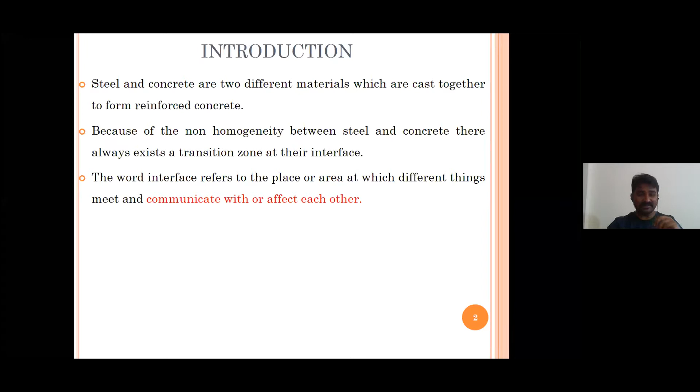So what is steel concrete interface? Let me begin with introduction. Steel and concrete are two different materials which are cast or fused together to form reinforced concrete. As the word interface refers to a place or area at which different things meet and communicate with each other, I'm more focused on this part, where they affect each other. See here, this is a cut sample.

This I took a core of a steel part and I just try to cut. So as you see, this is the steel part and this is the concrete part. Through our normal eyes, if you see the interface, it looks absolutely fine. There are no pores, nothing. So few cracks are there. Those cracks are due to cutting malfunctions.

So if I observe a particular section in scanning electron microscope, how do I see it? You see actually this way. This is the steel bar, and this is a scanning electron microscope image of secondary electrons. There are two modes: one is secondary electron mode, and another one is backscattered electron mode. This particular image is of secondary electron mode. So this is my steel bar, this is my concrete, and in between that there is a porous region. We are terming that as the porous zone between steel and concrete. As you can see, this is a porous zone between steel and concrete. And why this happens actually?

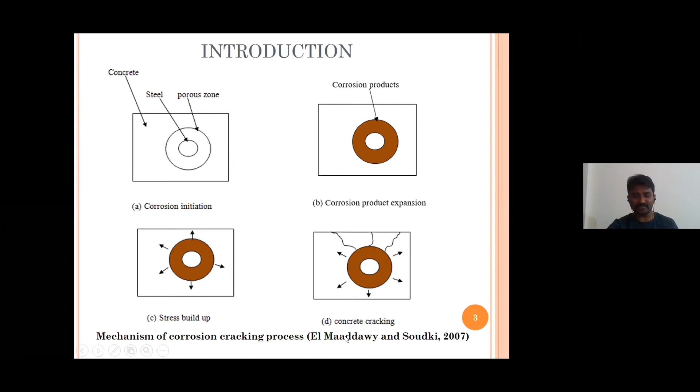So let me move on with the service life prediction. The basic focus of our study was to define service life in a perfect manner, and I'll be discussing the two-stage model and the three-stage model.

Way back in the 1980s, Tuutti proposed a service life prediction model which is a two-stage model. The first stage is the initiation period. He believed that once corrosion is initiated, soon after that the propagation starts.

There can be n number of reasons why corrosion initiates. Once corrosion is initiated, it takes a certain amount of time to get to the crack stage. At that point, the functional service life ends.

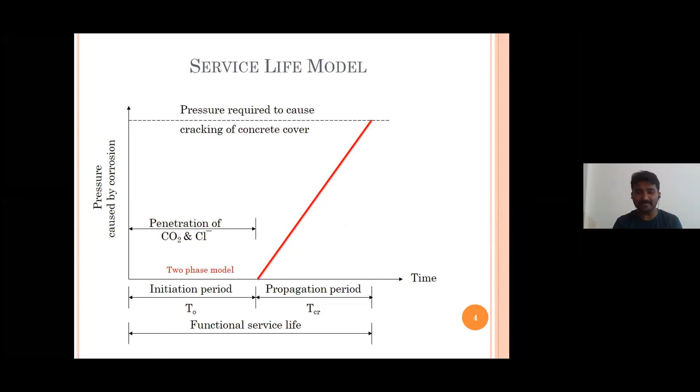After that, Liu and Weyers came up with the three-stage model. In this three-phase model, they considered the effect of porous zone thickness. They believed there is something happening at the steel-concrete interface that needed to be identified, and they found out that there is a porous zone thickness. Until that porous zone thickness is completely filled, there will not be any expansive pressure applied on the concrete pad. Because of that, they termed it free expansion or expansion time.

So this is the initiation period. After that there is the free expansion stage, and after that it is the stress build-up stage. So Liu and Weyers divided, or refined, the two-stage model into a three-phase model. They incorporated porous zone thickness into their model.

When people started assuming or predicting the service life using this model, the predicted service life came very close to the actual service life of the structure. So here we find the importance of porous zone thickness. However, in predicting the service life of a structure, people started assuming the porous zone thickness.

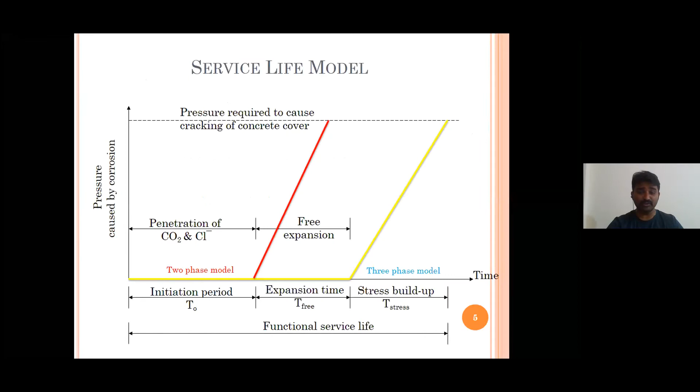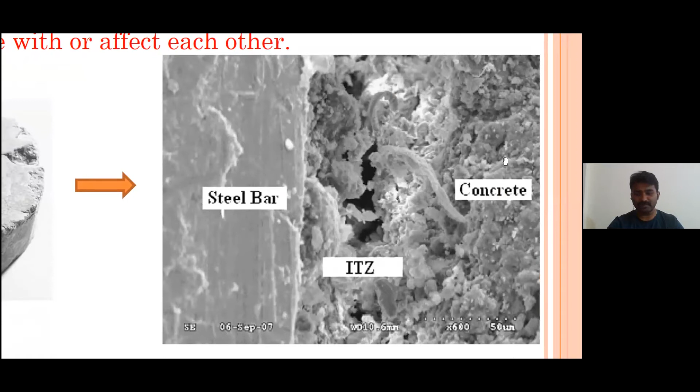For example, if you see this distance, I can show you in zoomed mode. See here, this is 600x, and these dots, as you can see, this is a 50 micrometer distance. As you can see, this much distance is nearly around 50 micrometers. Until this 50 micrometers is completely filled up, there will not be any expansive pressure on the concrete. So people started assuming the porous zone thickness.

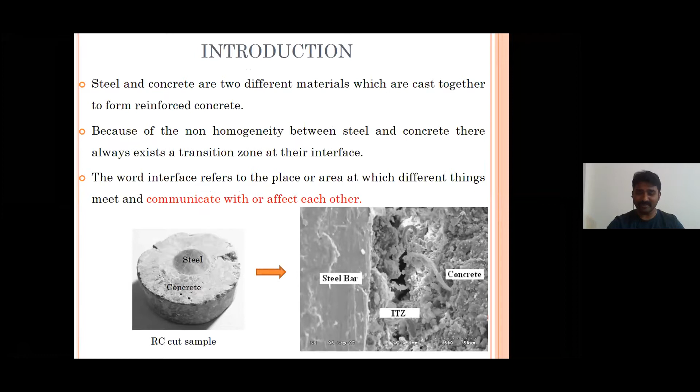Liu and Weyers in the 1990s predicted that there is a porous zone thickness, but without any experimentation or experimental validation, they started assuming this porous zone thickness. What happens then? Once they start assuming the porous zone thickness, even a slight variation in that assumed value leads to huge variation in the predicted service life of structures.

As you can see, Maaddawy and Soudki in 2007 proposed that the service life should be determined using this equation. As you can see, this is TCR, the total propagation period. They divided the propagation period by considering this delta naught, that is the porous zone thickness at the steel-concrete interface.

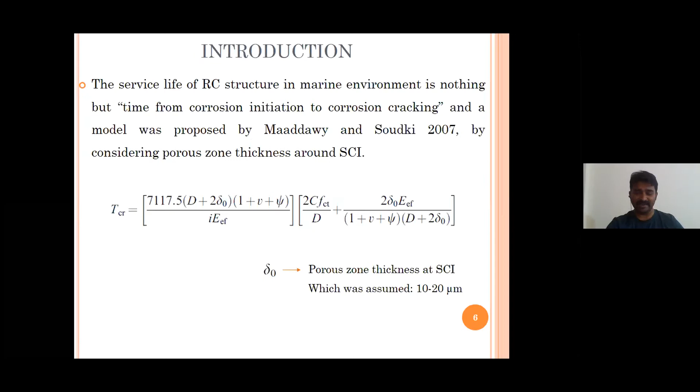However, in this case also, they assumed the porous zone thickness as 10 to 20 micrometers without any experimental validation or verification. In this present study, what we have done is experimentally try to find out that porous zone thickness.

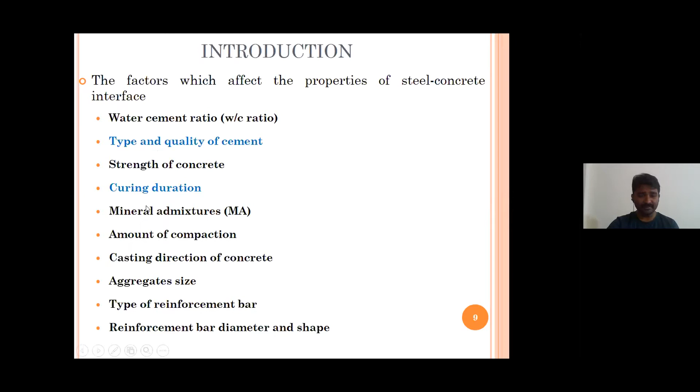While making the literature survey, we understood that there are very few papers particularly focusing on steel concrete interface. I'm happy to inform you that from India, me and my guide, Dr. Vibhuti Bhushan Das from NIT Surathkal, were the first people to contribute to the steel concrete interface research from India. If you see the Scopus website from India, there are only 3 papers, and all 3 papers are ours. So only a few papers are available regarding this. This is a thrust area right now. If anybody is interested, please continue your research on this part. A lot of things need to be done yet on understanding the steel concrete interface properties.

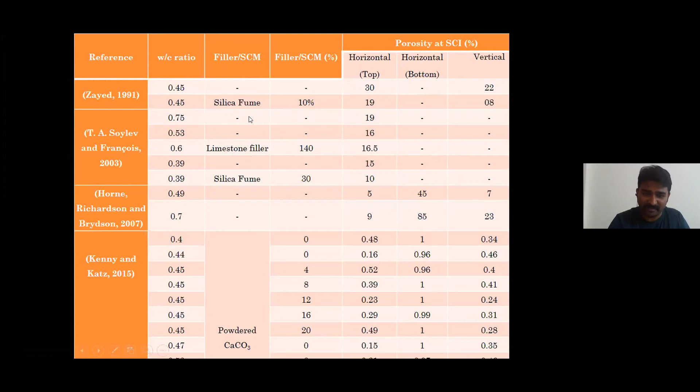So these are references, Zayed and others, looking at water cement ratio, filler, and what is the porous zone thickness. These are some of the literature data. Some people have used silica fume, studying what happens if silica fume is added. These are a few other studies in terms of micrometers and percentages.

To present that research in a condensed form, these are different researchers who have studied the effect of water cement ratio. Please remember, this is literature data that we have compiled, not data that I have done myself.

So what happens if water cement ratio increases, to the porous zone thickness at steel concrete interface? As you can see, all the lines are going up. As the water cement ratio increases, the porous zone thickness at steel concrete interface is increasing. As the water cement ratio increases from 0.4 to 0.5, the porous zone thickness increases up to 300 micrometers. Okay, so this is the literature data.

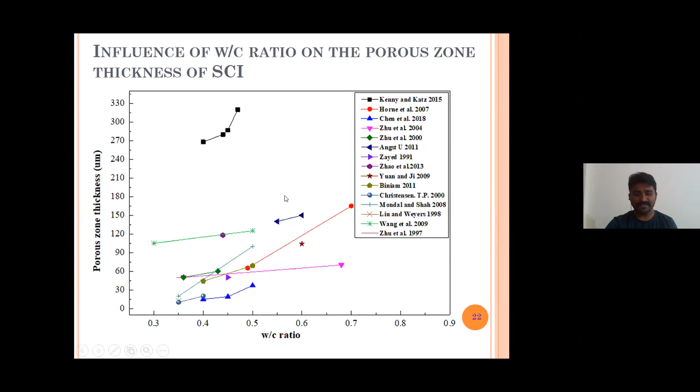In this present study, we tried to investigate the significance of different types of cements, for example OPC, PPC, and PSC. Nowadays people are shifting towards PPC and PSC, so we tried to understand the effect of OPC, PPC, and PSC on the engineering properties of steel concrete interface. We used characterization techniques: scanning electron microscope, energy dispersive X-ray spectroscopy, and nano indentation. Please understand, due to time constraints I am not discussing the nano indentation part, but we have done it to understand the engineering properties of steel concrete interface.

What do I mean by engineering properties? One is what is happening to porous zone thickness, what is the effect on the hydration products formed at the steel concrete interface, and what is the total influence on the bond strength. These three parameters I'm converging and terming as engineering properties. The second objective was to determine the effect of curing duration on compressive strength, ultimate bond strength, and microstructure properties of steel concrete interface produced with OPC, PPC, and PSC concrete. That was the focus of our study.

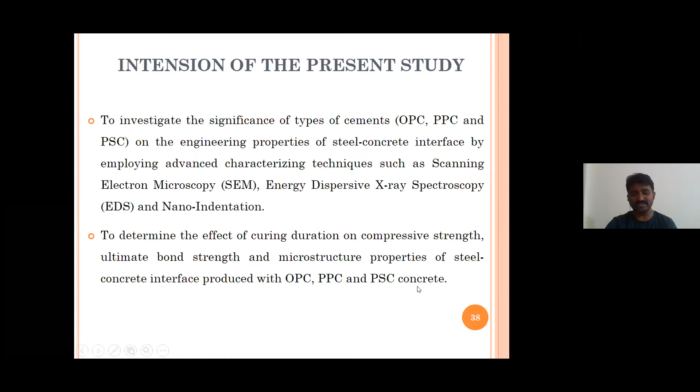So remember, folks, while doing the scanning electron microscope analysis, the sample preparation plays a very important role. My main focus was on sample preparation. I'll come to that sample preparation in a bit.

So this is the experimental methodology that we have adopted, physical and chemical properties of OPC, PPC, and PSC concretes. These are the chemical properties. Remember, OPC has highest specific gravity, PPC is slightly lesser than that, and PSC is very close to OPC concrete. Even if you see the fineness, OPC fineness is slightly lesser, PPC slightly higher, and PSC is the finest cement.

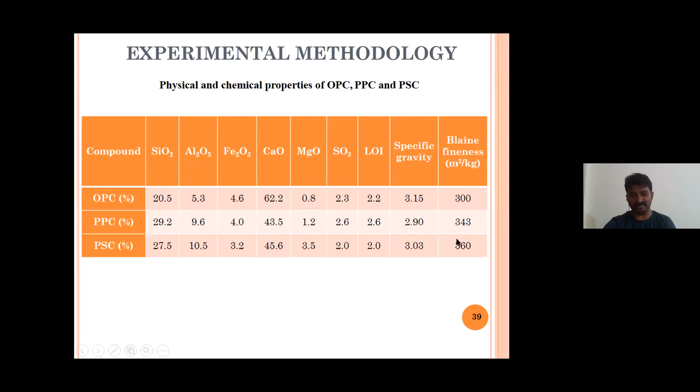So this is the gradation curve for OPC, PPC, PSC, fine aggregate, and coarse aggregates. This is coarse aggregate, fine aggregate, and OPC, PPC, PSC are almost similar, but there is a little bit of difference in the fineness.

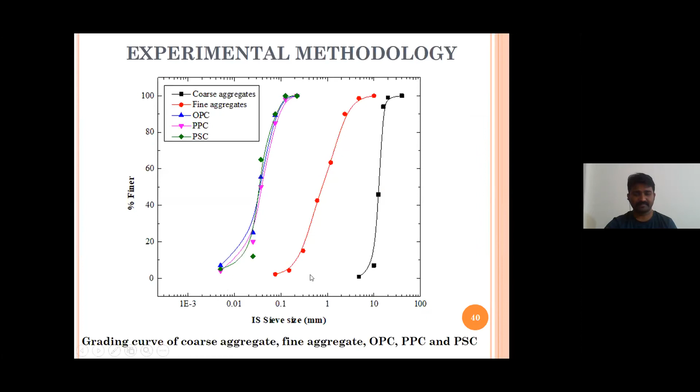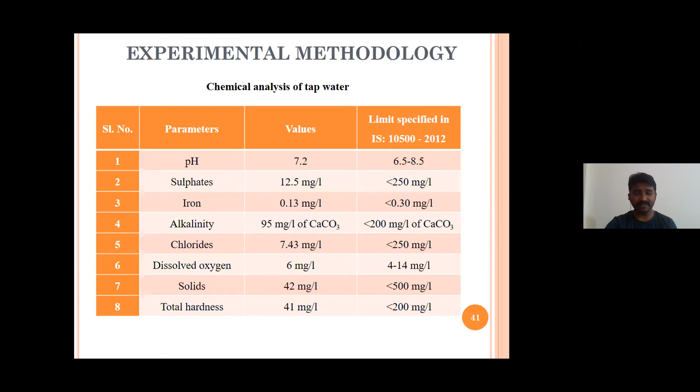So this is the chemical analysis of tap water. In one of the papers, reviewers have asked us, does the water properties affect the properties of steel concrete interface? The kind of water that we use for concreting, will that affect the properties of steel concrete interface? So for that reason, people have asked us to put this chemical analysis of water. So we have done the chemical analysis of tap water, which was available in our lab. So it satisfies, and we could classify this water as potable water.

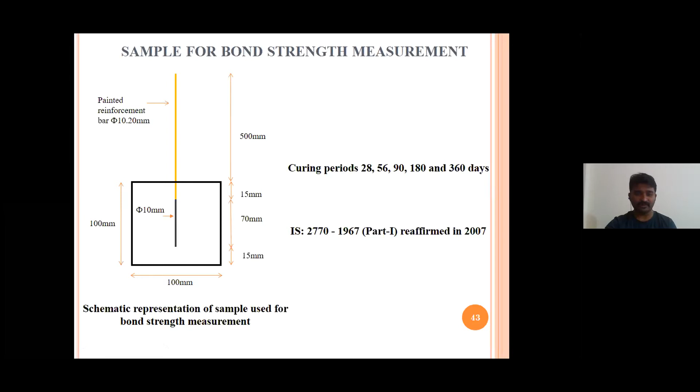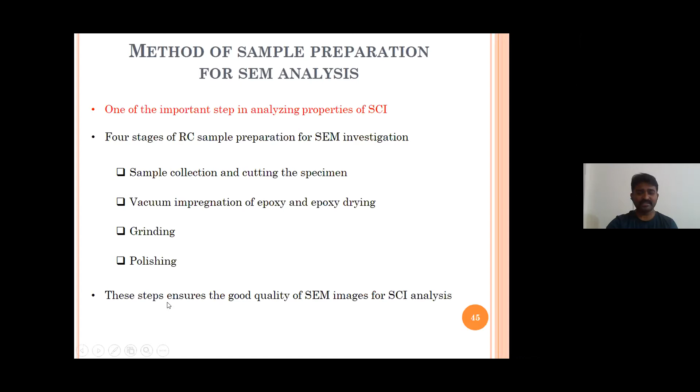As I mentioned before, sample preparation for SEM analysis is the prime important step to examine the engineering properties of steel concrete interface. This is one of the important parameters in analyzing the properties of steel concrete interface. Totally, we have divided the sample preparation into 4 stages. The first one is sample collection and cutting the specimen. Second one is vacuum impregnation and epoxy drying. Third one is grinding. Fourth one is polishing. These steps ensure a good quality of SEM images in the analysis.

So what do you mean by that? Remember, as I told you before, we had used RC sample of 10 centimeter. This is the C clamp which we have used to hold this cube in between, and this is the core cutter. And I tried to get the perfect steel concrete sample of this kind. See here, this is the steel and this is the concrete, and the diameter of bar that we have used was around 32 mm. The rod is of 10 mm and the total diameter of this is 32 mm.

Why have we restricted ourselves to 32 mm? Our SEM sample holder dimension was maximum it could occupy 35 mm. The diameter that you can imagine is like a carom coin. In the next slide, you'll come to see.

See, this is the way the samples look after cutting. This looks like a carom coin. The carom coin diameter is 32 mm total. In our case, the sample holder diameter of our SEM was 35 mm maximum, that's why we had to restrict our sample dimension to 32 mm.

So this is how the sample looks after taking the core. This is how the steel concrete portion looks like. After that, if you start cutting the concrete to observe the microstructure using high-speed or low-speed cutters, the concrete would thrash out, or chip out, in other words.

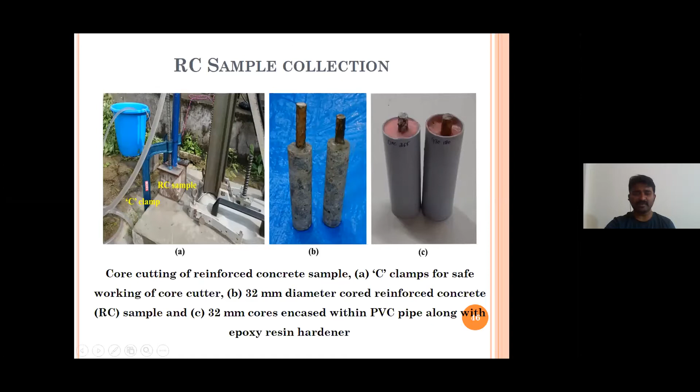As I'm cutting this sample, obviously there will be some amount of distortion, and because of that the porous zone thickness was increasing. To avoid that, we have used a slow speed precision diamond saw cutter. This is the precision diamond saw cutter supplied by Ducom.

See, this is the blade, and here we put our sample. To cut the sample in the high speed cutter, it hardly takes 8 to 10 seconds. But in the low speed precision diamond saw cutter, it takes around 4 to 5 hours to cut this cross section.

Okay, so once you cut, this is the way you see the samples after we cut. As you can see, this is the surface we are seeing, the cross section. This is the PVC pipe, and this pink color, as you are seeing, is the hardener, the rapid hardener, you could say. So this is another sample - likewise you see the steel concrete interface.

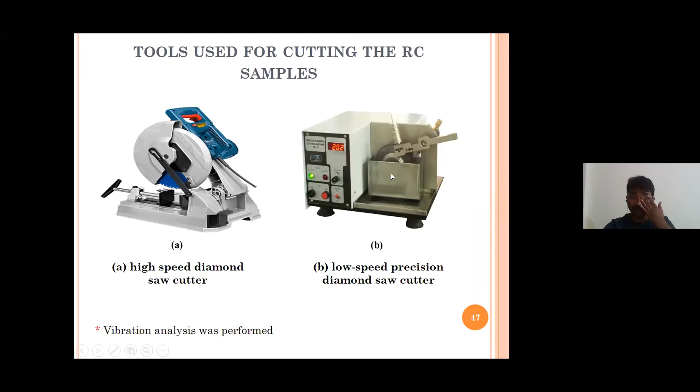Once you cut the sample, the next important part is what is the difference between cutting in a high speed diamond saw cutter and a low speed diamond saw cutter. That part we'll discuss in our coming slides. I'm just discussing here the sample preparation techniques before going for SEM analysis, so that we are discussing now.

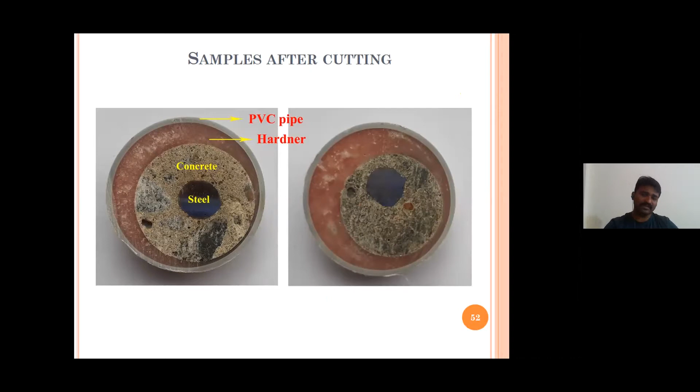So this is grinding and polishing. Before starting the grinding process, the specimen must be molded with ultra low viscosity epoxy. What do I mean by that? These were inserted in a certain liquid, ultra low viscosity epoxy, so that once I start grinding, the epoxy will go and fix in these holes or pores. As you can see here at the interface, we have a lot of pores. I wanted those pores to look bright black in our SEM images, that's why we use ultra low viscosity epoxy.

Further, these ultra low epoxy specimens were dried at 3 different temperatures. In the literature, it was mentioned that we have to use 90 degrees Celsius, but in our case, when I went with 90 degrees Celsius, there were some shrinkage cracks that we were observing at the interface. So to reduce those shrinkage cracks, we have gone for 80 degrees Celsius and 60 degrees Celsius also.

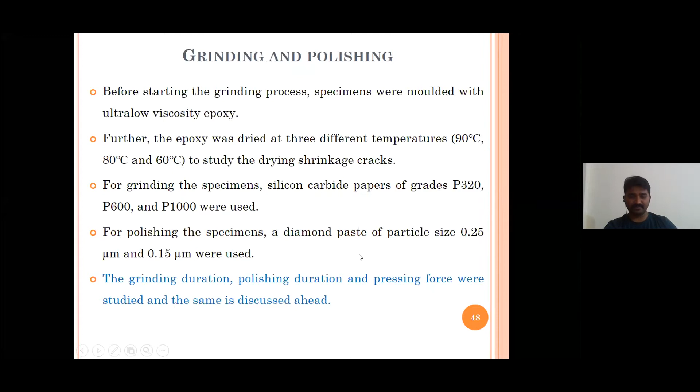For grinding the specimen, silicon carbide papers of grade P320, 600 and 1000 were used. For polishing the specimens, diamond paste of particle size 0.25 and 0.15 were used. Grinding duration and the grinding polishing pressing force were also studied. So I'll come to those parts while I discuss the results and discussion.

So this is how the sample looks like. Samples immersed in isopropanol, ready for SEM analysis - this is the way it looks. The rapid hardener I've kept intact, and the other part we have grinded out.

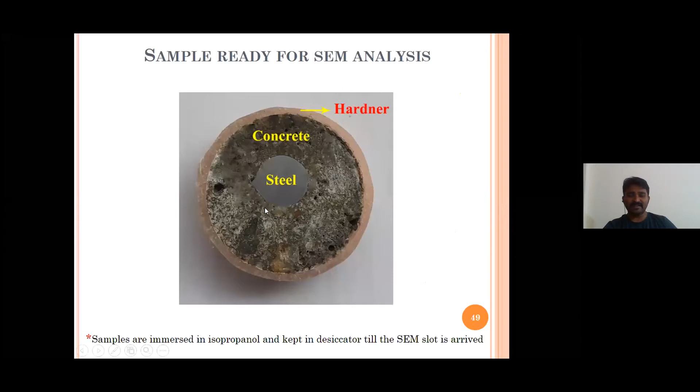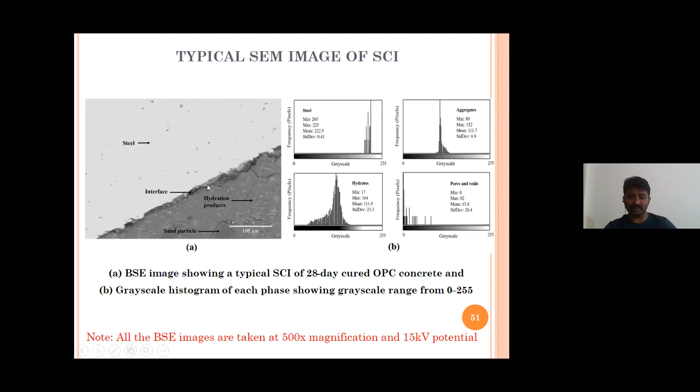To bridge that gap, we have used a grayscale thresholding method. Once I apply a grayscale thresholding value - this we got from one of the other papers - if we threshold this with a grayscale value of 42... for this purpose I've used an image analysis tool, ImageJ, which is a free image analysis tool. If I threshold this image with a gray value of 42, I'll see an image of this kind.

So I'll see an image of this kind - see the variation? Here, as you can see, if I threshold this SEM image with a gray value of 42, you're observing it this way. The other parts are made black, so I'm just concentrating on this particular part. See here, there was a crack - you can observe that crack here also. Can you make out that difference?

So that is the porous zone which I'm interested in. I have to measure the thickness of this porous zone. Some thickness is there - if you see this length, this much length is 100 micrometers, then I'm interested in identifying how much this distance is, that thickness. So that thickness comes out to be these values. This analysis we have done in the image analysis tool called ImageJ.

So, Part A is the BSE image after thresholding with a gray value of 42. You can threshold with even 0, 10, 20, 40, even up to 56. Why have I selected only 42? In one of the papers we came to know that the pores vary from 0 to a maximum value of 42. Through that paper's reference, we started thresholding with the value of 42.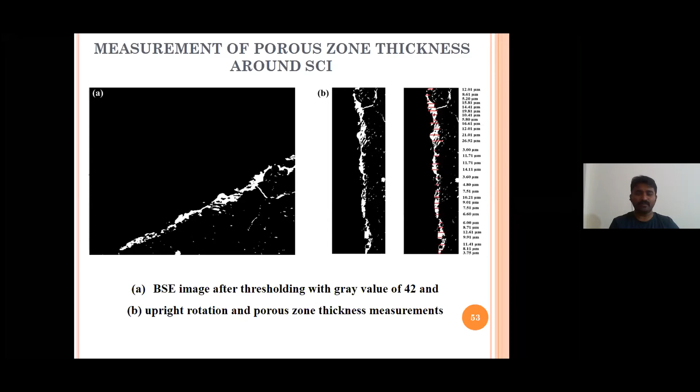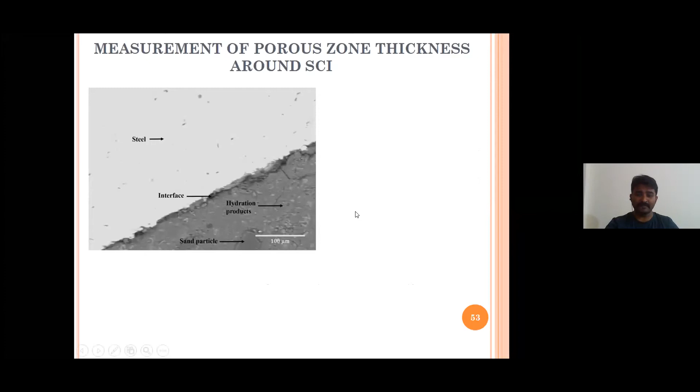And the same was maintained for all the SEM images. As we are doing images, we have to be very peculiar with the magnification that we are taking. All the SEM images were taken at a fixed magnification of 500x, and the grayscale thresholding value was 42.

As you can see here, this is 12.01 micrometers, 8 micrometers, 5. Likewise, at each difference, the red marks as you are seeing are the selected values, and you will come up with these values through the image analysis tool, ImageJ. All this is image processing - we have used the ImageJ analysis tool. I'm not discussing how I did this in detail, but we have done this using the image analysis tool.

These are four different SEM images, as I mentioned before. I've taken SEM images in a clockwise direction at 12 locations, and these are four representative locations which I've named spot 12, spot 3, spot 6, and spot 9, representing the time approximately. This is my steel, this is the interface, and this is my concrete.

As you can see at spot 12, I've done thresholding and observed the porous zone thickness this way. At spot 3, the porous zone thickness varies this way. At spot 6, this is the variation. At spot 9, this is the variation. So at different locations, you can identify the porous zone thickness.

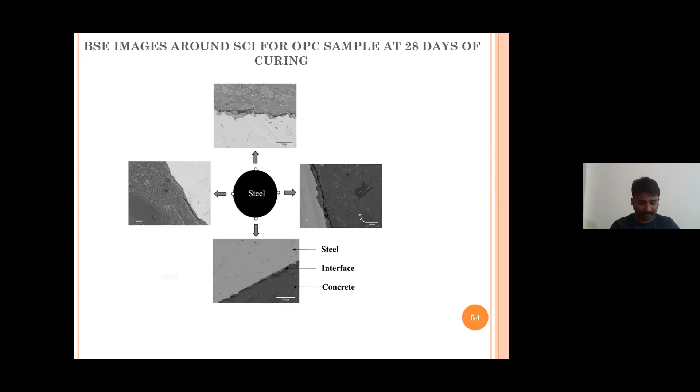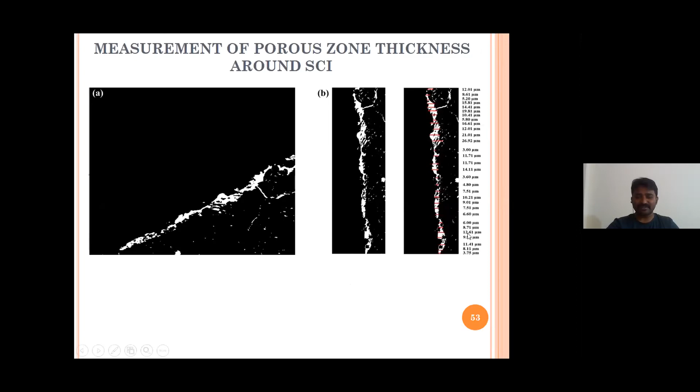So why did I end up with only 12? There has to be some statistical value to prove that 12 is the best number of locations. For that, we used the Student's t-distribution factor. From that, if you measure at 12 locations and at each location measure at least 22 points - we have measured more than 22, the values are 30 plus - then we can prove that the values we are measuring are statistically correct.

So at these four locations, these are the porous zone thicknesses. That is how we measure the porous zone thickness. Once the porous zone thickness is done, that is the first engineering property I was trying to study.

The next engineering property was the hydration product. What hydration products form at the steel-concrete interface? We are very curious about this. Usually the hydration product is CSH, there is calcium hydroxide, and some voids - these are the three major parts of the hydration product. We wanted to know what kind of hydration product is formed at the interface.

To identify what kind of hydration product is formed at the interface, we used energy dispersive spectroscopy, or EDS analysis. So this is my steel and this is the interface. The red portion you see is at 0 micrometers, very close to the steel surface, and I started taking measurements 20 micrometers away from the steel surface. For example, this is my steel surface and this is my concrete part. Very close to the steel surface, I selected one point.

At that point you will see the chemical properties - what kind of ions are there: calcium, silicon, aluminium, iron, oxygen, and all. These values were obtained at different locations. For example, this is at 0 micrometers, and spectrum 2 is at 20 micrometers. This is the result for spectrum 1, and this is the result for spectrum 2. So for these two, what is the difference?

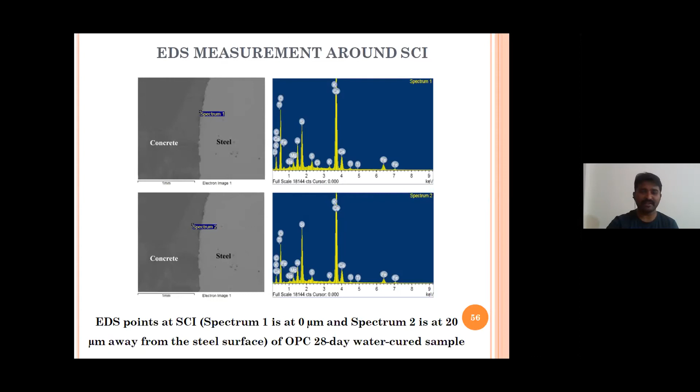Through the Ca/Si ratio, if it is more than 1.8, I can classify that the calcium content is more, and from that I can identify that the hydration product formed here is calcium hydroxide. Also, if the Ca/Si ratio is in between 0.8 to 1.8, I can classify that as calcium silicate hydrate. This is given in the literature part, we selected that from the literature.

Indentation was also done at the same locations where we found the hydration products. Nano indentation was also performed, but I'm not discussing this nano indentation part in today's presentation.

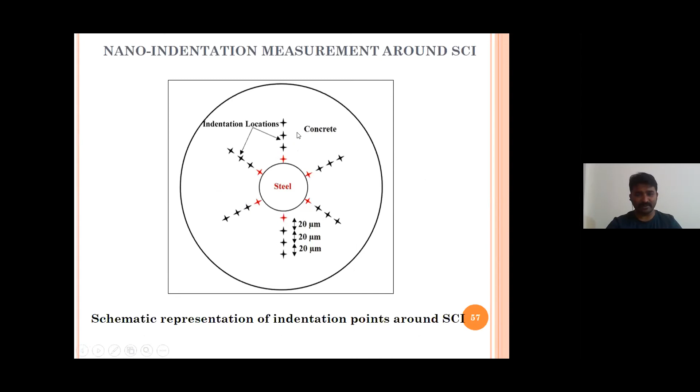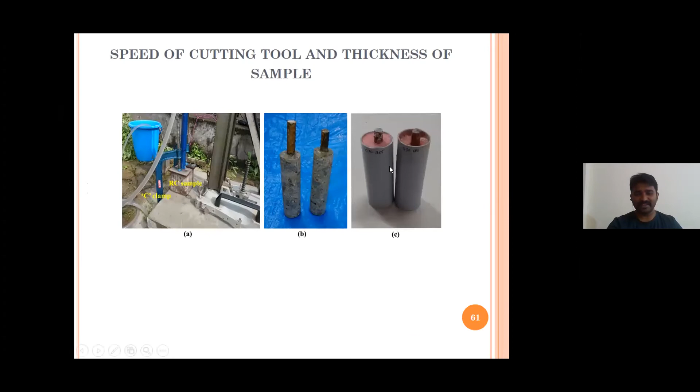As I told you in previous slides, we used two cutting tools - one is a high speed cutter and another is a low speed cutter. What are their effects? We also used sample preparation techniques such as epoxy impregnation, grinding, and polishing. What are all these effects on the properties of the steel-concrete interface that we tried to study? So as we have seen already, we cut like this using two cutting tools. This is the cutting blade and this is the sample that I have used.

Remember, there will be a lot of vibration while cutting the sample. One of the reviewers asked us, can you quantify the vibration and its effect during cutting, and how it affects our steel concrete interface properties? So for that, we have used sensors.

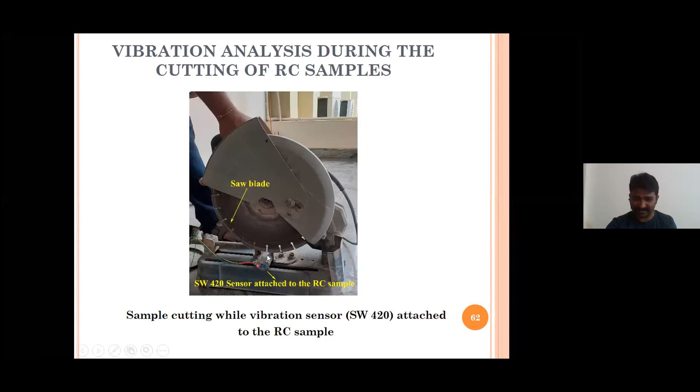The sensor we used was the SW420 sensor, which is attached to the steel concrete interface like this. Then I'll cut this one. After cutting, the vibration analysis went this way. This is the SW420 sensor and this is the circuit diagram for it. This is how the analysis goes. This is my cutting tool, the diamond blade, 3 mm thickness for the high speed cutter.

This is an example of a high speed cutter. For the low speed cutter, the thickness was just 0.4 mm, very thin. So once we cut, this is my RC sample. This is X, that is the distance.

We selected different thicknesses: 15 mm thick, 10 mm thick and 6 mm thick. For example, if I cut very close to this, I can hardly get a 1 mm thick sample. If you imagine a coin, the thickness of that coin is 15, 10 and 6 mm. We have studied the effect of this on the engineering properties of the steel concrete interface.

So this is the SW420 vibration sensor. We connected it to an Arduino board, and that is connected to a computer. Through this arrangement, we studied the vibration analysis. See here, this is the Arduino board. This USB cable is directly connected to my computer.

So this is the SW420 vibration sensor. It is connected to the Arduino board, and through the Arduino board it is connected to my computer, and here we see the results. The result will come here in the form of vibration. So this is how we cut.

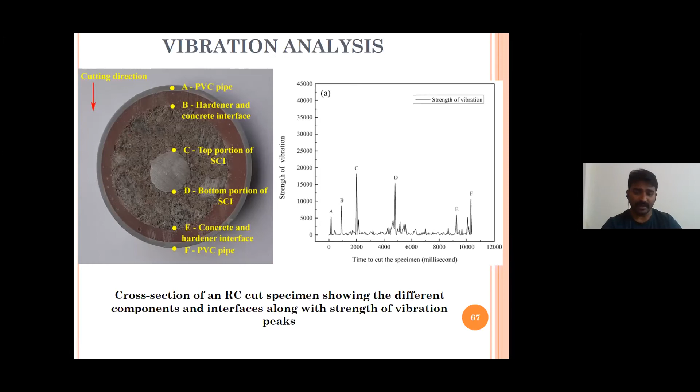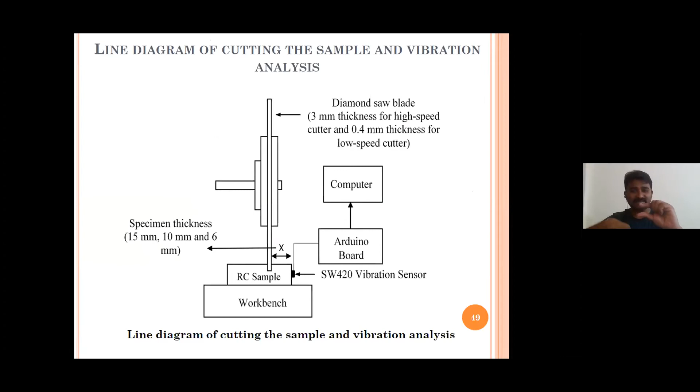As I start increasing the sample thickness, there is a chance that my sample goes and touches the electron beam. That's why there was a restriction for us on sample thickness. I must get as thin a slice as possible. For that, we tried with 15 mm and started with lesser. The maximum size I could accommodate in my SEM equipment was 15 mm.

We have kept the scale the same, 0 to 45 for all three. The x-axis is slightly changing depending on the time it took to cut that sample. For part A, 15 mm thick samples, these are the strength of vibration values at points A, B, C, D, E, F, at different interfaces.

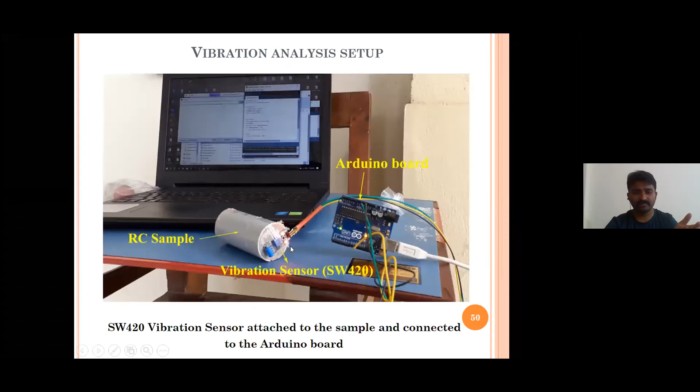The strength of vibration for 15 mm samples is slightly lesser compared to 10 mm. For 10 mm, there is a sudden increase at the steel-concrete interface here, and even at points A, B, as I'm going very close.

See here, very close, the vibration is increasing actually. If I cut at the center part, the vibration at interfaces is less. As I go towards the free end, since it's free, the vibration increases more and more. So that is what we conclude from this study.

You have to have at least 15 mm thick samples or larger. If your SEM allows you to go for 20 mm or 30 mm thick samples, that is good. But in my case, there was a restriction, so I had to restrict myself to only 15 mm. For that 15 mm also, there is some vibration, but it is lesser compared to 10 mm and 6 mm. For 6 mm, there is huge vibration, almost 45,000 strength of vibration.

So this is for the high speed cutter, strength of vibration with respect to time taken to cut 15 mm with the high speed diamond saw cutter. As I told you, we used 2 cutters for cutting the samples: one is the high speed diamond saw cutter, another is the low speed diamond saw cutter. This is the vibration study for the low speed precision diamond saw cutter.

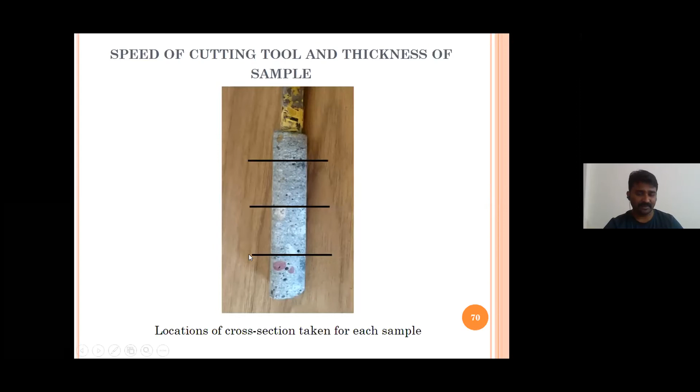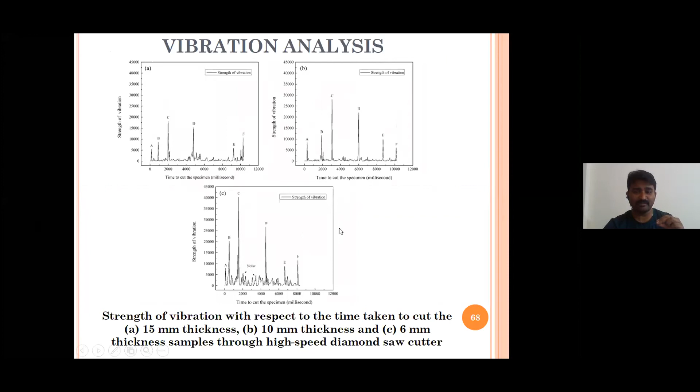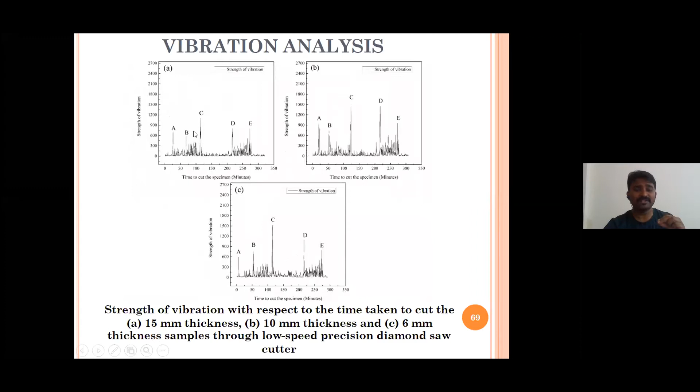If you cut the sample with the low speed precision diamond saw cutter, as we discussed, it took around 4 to 5 hours. With the high speed cutter it was milliseconds—hardly 10 seconds to cut all the samples. But with slow speed cutters, it takes around 4 to 5 hours. That's why vibration is very, very less in slow speed cutters. For that reason, you observe a pretty good steel-concrete interface in low speed cutters. Even there, we chose 15 mm, 10 mm, and 6 mm thick samples.

For 15 mm thick samples, the damage is very less. For 10 mm, there is some amount of damage, and for 6 mm, because of little bit of heat, we could observe some micro cracks at the interface. So from this study, we concluded that we should have at least 15 mm thick samples, and we should use a slow speed diamond saw cutter for cutting the samples.

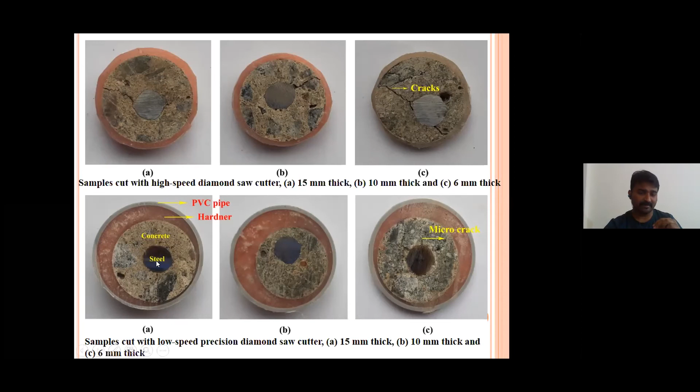Then, as I told you, this is another parameter we should look into for SEM observation. It is molding the specimen with ultra low viscosity epoxy and drying it. I wanted these patches to look very dark in SEM images, so I have to incorporate the ultra low epoxy, wherein it appears dark in BSE images.

As you can see, drying shrinkage occurs once I apply the ultra low viscosity epoxy. I have to dry that epoxy before I grind it. It's like a paste - if you apply it on top, it goes inside the pores, and I have to dry it afterwards. So drying temperatures we selected were 90 degree, 80 degree, and 60 degree.

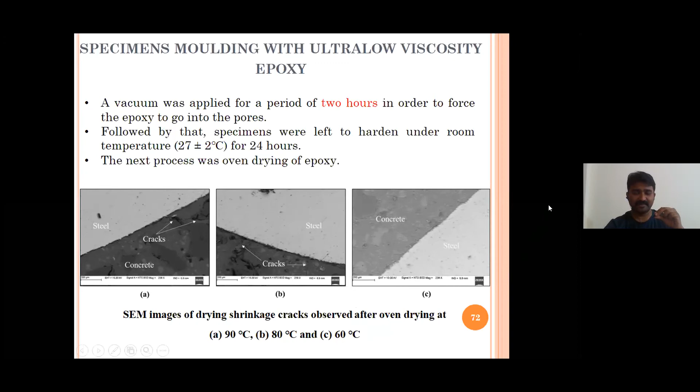At 90 degrees, if you see, there are a few cracks we could observe. These are called shrinkage cracks. Even at 80 degrees, a few cracks are observable. At 60 degrees Celsius, there were no visible shrinkage cracks, even at magnifications of 500x or 250x. So from this we concluded that the epoxy drying temperature should be only 60 degrees Celsius. If you increase it more and more, you observe more drying shrinkage cracks.

So the next step is grinding and polishing. Once the epoxy is done, I have to grind and polish it. For grinding, we used 3 silicon carbide papers: P320, P600, and P1000 - these are just like sand papers. We grind on that. I used an advanced polishing machine where we can even control the pressure applied. Then for polishing the specimens, we used diamond particle paste, that is 0.25 micrometer and 0.15 micrometer.

Grinding duration and force also play an important role. The force is nearly 25 kilonewton that we have kept. We have tried with different forces also, that we will discuss in a bit.

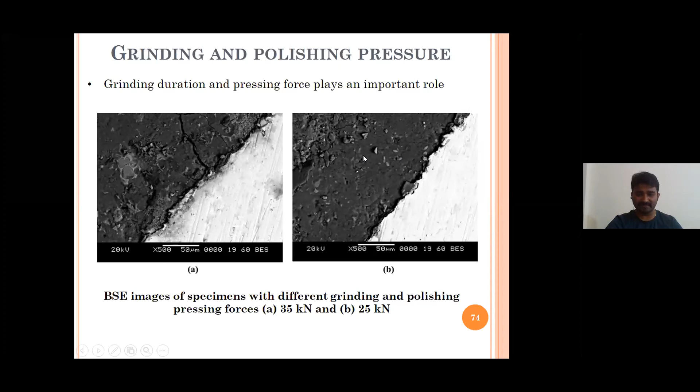So we tried with 35 kilonewton, which was mentioned in previous papers. But for 35 kilonewton, if you see, there are a few cracks we could observe in our SEM images, and there is some distortion of the steel surface - if you could observe my cursor, there is some amount of distortion here, and a few cracks are also there. That is for 35 kilonewton force. Then I reduced it to 30, and then to 25. For 25, the distortion of steel is very little, but there is some amount of distortion still there. But at least I have to keep 25 kilonewton to observe the best SEM images. So from this, we concluded that the force should be 25 kilonewton and time should be at least 1 minute, should not be more than 1 minute.

Okay, now we'll discuss a few results. Effect of speed of cutting of RC samples on porous thickness of steel concrete interface. As I told you, we have used a high-speed diamond saw cutter and a low-speed diamond saw cutter.

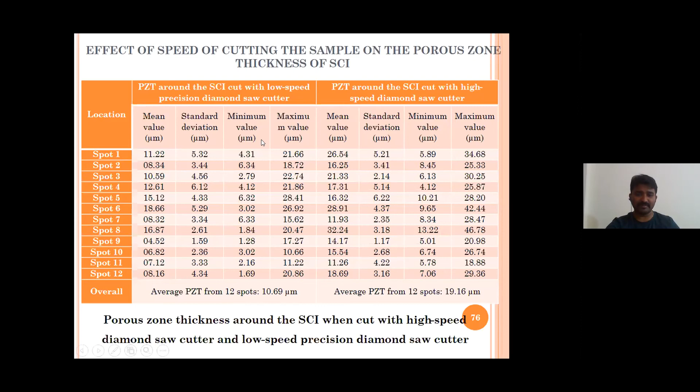These are the porous thickness values that we have measured, from the SEM images shown earlier. These are mean values of porous thickness at 12 spots, along with standard deviation, minimum, and maximum values. So from the mean value plots, we try to understand the effect of cutting tools, high speed cutters and low speed cutters, on porous thickness.

As we use a high speed diamond saw cutter, we are actually increasing, or causing some damage to, the steel concrete interface properties, that is, the porous zone thickness. The porous zone thickness is increasing because we are intentionally increasing it by using the high speed diamond saw cutter. That means whatever the accurate measurement is, we are not able to find it.

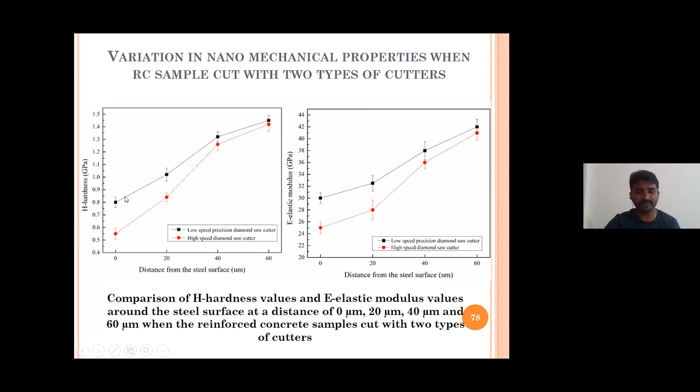So in summary, if this is your steel concrete interface and this is the sample that we use, this can be extrapolated to field conditions also. What do we do if I want to study the service life of any bridge? Remember, in bridges, we don't cut the reinforcement rods, so that is a slight disadvantage of this approach. But at least in the laboratory presentation, I can cut the steel and try to identify what is happening to my steel concrete interface.

See, this is the rapid hardener, as we can say. This is the steel part, and the epoxy coating is there, and after that I have applied an epoxy hardener, that is Araldite.

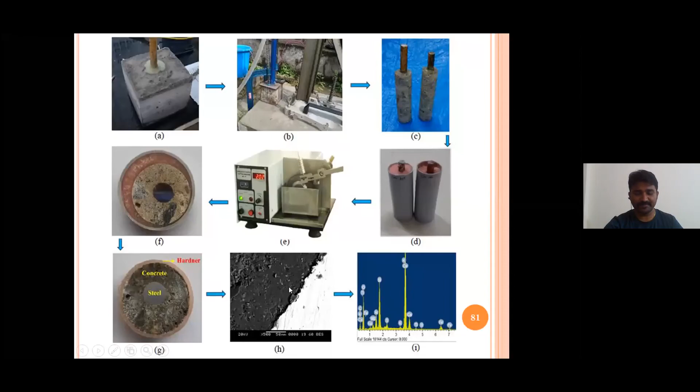The size of the core depends upon the sample holder dimensions of your SEM. This works particularly for laboratory samples. For field samples, we have to go for environmental SEM or other SEMs, where the sample holder dimension is larger than our regular SEMs.

The speed of the low speed diamond saw cutter can be varied from 100 to 200 RPM. If you increase it beyond 200 revolutions per minute, some damage will be induced. So if you want a perfectly measured porous thickness, you have to use 100 to 150 RPM.

Our low speed diamond saw cutter operated in the range of 140 to 150 revolutions per minute, and the thickness of the blade in our case was 0.4 mm. You can go up to 0.5 mm maximum. If you use high speed diamond saw cutters, it will significantly damage the properties of the steel concrete interface.

Thickness and vacuum impregnation, as we have discussed, is just summarized here.

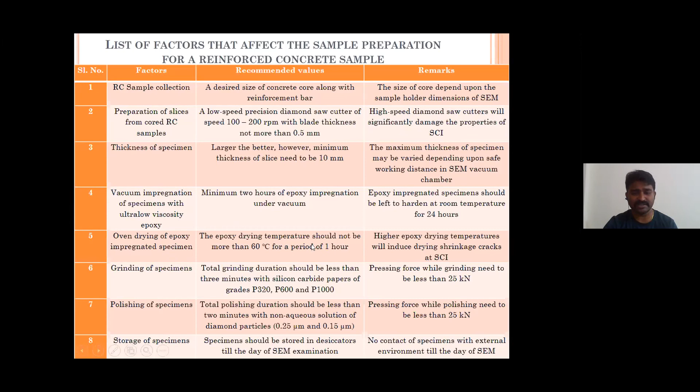Now we were interested to know the hydration properties. One is obviously the porous thickness, which we have understood how to measure. The next is what is happening to the hydration products at the steel concrete interface, and what is the influence of curing duration. If I cure for 15-20 more days, what will happen?

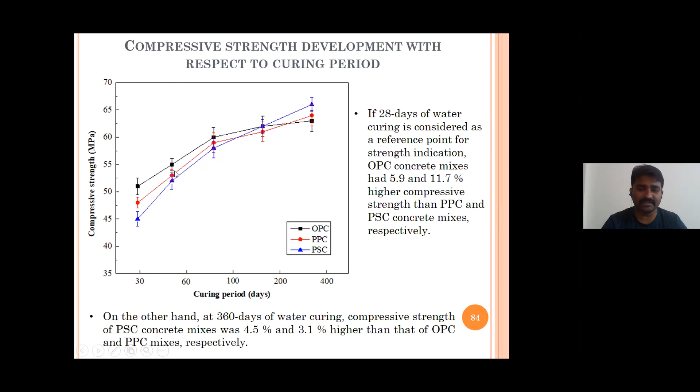As the curing period increases till 1 year, we studied up to 360 days. I'm happy to share that PSC concrete gains strength at a later point of time. At 1 year, the strength of OPC concrete also increases, but there is significant improvement in PPC and PSC concrete at the age of 1 year. From this we can say that PPC and PSC concrete are slow in gaining initial strength, but at later stages they beat OPC. The major reason for this sudden increase in compressive strength is pozzolanic reactions.

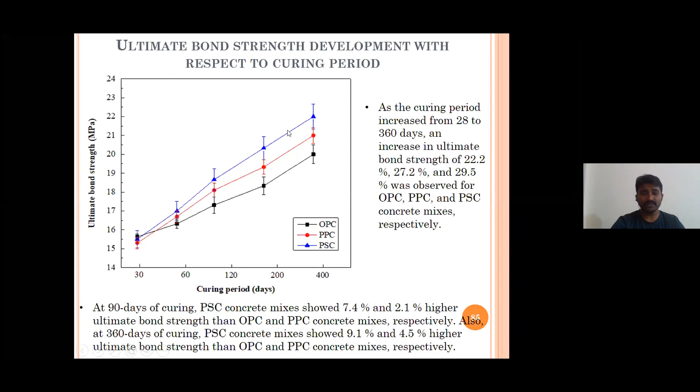The same trend can be observed in bond strength, the ultimate bond strength at 28 days. OPC, PPC and PSC concretes have similar ultimate bond strength. As the curing period increases to 56, 90, 180 and 360 days, PSC concrete achieves more bond strength compared to OPC and PPC. The main reason is that PSC concrete's Blaine fineness is very high compared to PPC and OPC, so the finer the material, the more the reaction, and at the steel concrete interface PSC concrete shows better ultimate bond strength compared to OPC and PPC.

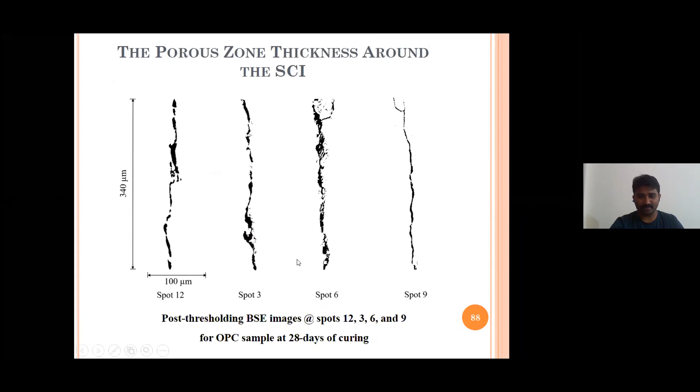So this one is about curing period and what is happening to the porous zone thickness. We have discussed this at spots 3, 6, 9, and 12, for OPC, PPC and PSC. Initially we discussed this for high speed cutters and low speed cutters, and now we are discussing it for OPC, PPC and PSC.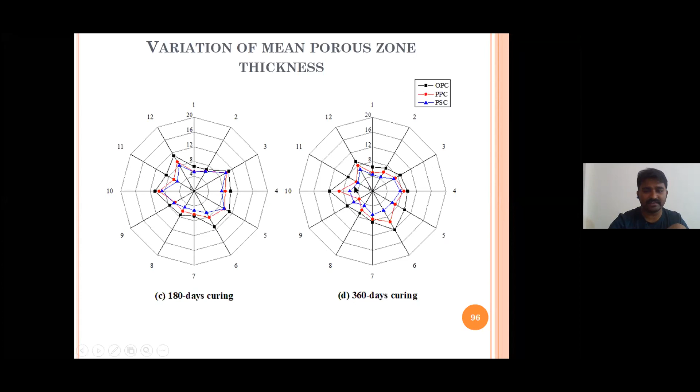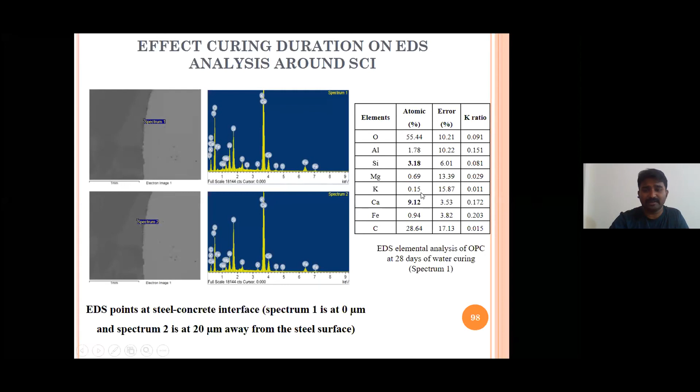See here, the silicon content is 3.18 and calcium content is 9.12. So if I just do a Ca by Si ratio, what will happen? These are the values we get at 0 micrometer distance, at 20, 40 and 60 micrometer distance. If we increase to 40 and 60, we get different elemental maps. Those results are shown here: 0, 20, 40, 60. So these were the results.

Ca by Si ratios are 2.88, 2.64. What does this signify? As I told you before, if Ca by Si ratio is more than 1.8, that signifies the presence of calcium hydroxide at the interface. This is at 0 micrometer from the steel surface. At the interface, there is predominantly calcium hydroxide available.

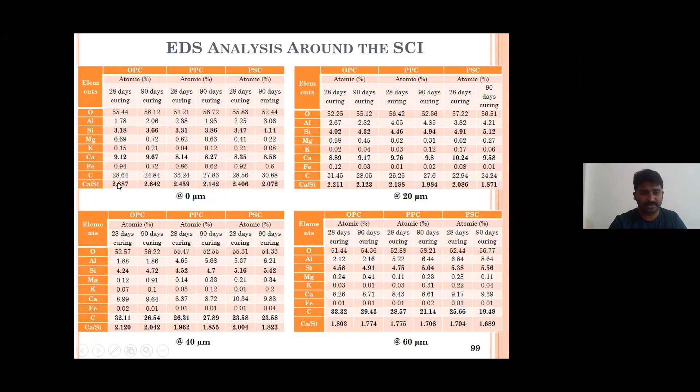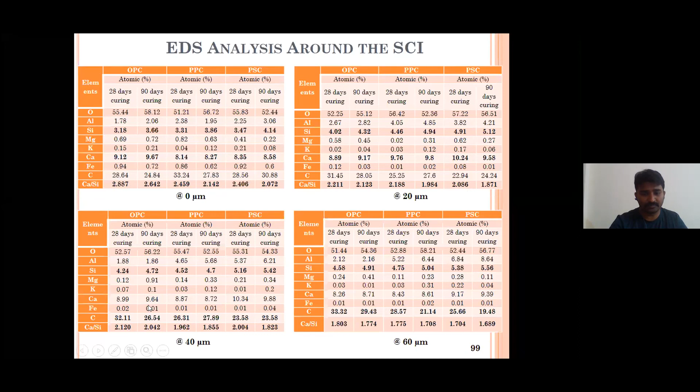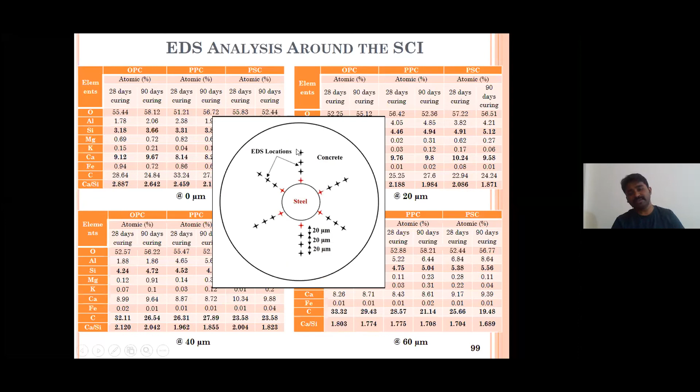As I move away from the interface, see here, 2.88 at 0, at 20 micrometer 2.2, directly from 2.8 to 2.2. From 20 micrometer to 40 micrometer, from 2.2 it is 2.1, then again at 60 micrometers it is still reducing. As you move away from the interface, the Ca by Si ratio is reducing. What does that indicate? So this is another graph we have plotted.

Ca by Si ratio with respect to distance from steel surface, using the previous data only. 2.88 was there for OPC concrete, at 20 micrometer it reduced, at 40 micrometer reduced, at 60 micrometer reduced, and this is for OPC, PPC and PSC. OPC is higher; for PPC and PSC it also starts reducing.

One point to observe here is Ca by Si ratio for OPC is higher. That means the calcium hydroxide content at the steel concrete interface is higher for OPC, lower for PPC and PSC concrete. This is for 28 days curing. At 90 days curing, all of them are reducing.

For OPC it was 2.88, then it reduced to nearly 2.6, then 2.5, and they keep reducing. This indicates that the calcium hydroxide content is reducing as I increase the curing period. What does that signify? It signifies that the calcium hydroxide is converting to some secondary CSH, which might constitute or improve the bond strength.

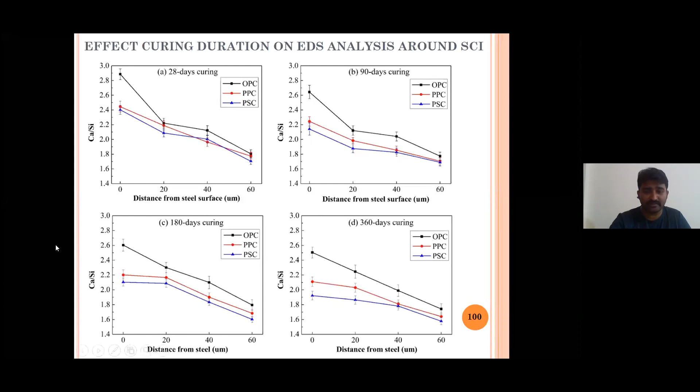So we are curious to know what is the effect of this on ultimate bond strength. We have studied that also, for OPC, PPC and PSC: the ultimate bond strength and Ca by Si ratio of the steel concrete interface at 28 and 90 days of curing.

These are the 28 day ultimate bond strengths for OPC, PPC, PSC. PSC and OPC are almost closer, PPC is a little lesser. And these are the Ca by Si ratios: 2.88, 2.45 and 2.40. At 90 days, for OPC it was 2.88, it reduced to 2.6. For PPC it was 2.45, reduced to 2.14. For PSC it was 2.4, reduced to 2.07. Because of this reduction, there is an increase in ultimate bond strength.

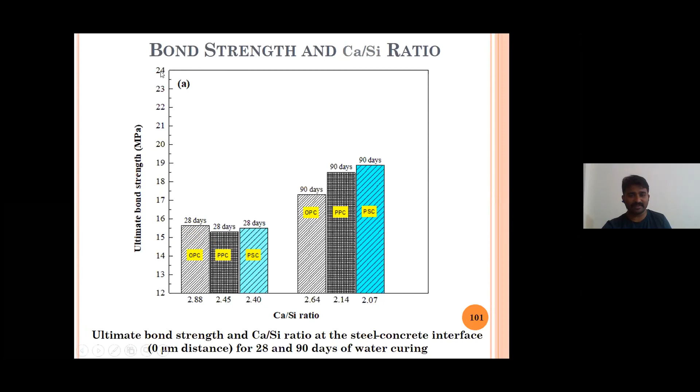So from this we conclude that even for 180 days and 360 days, same thing happens - we have kept the y-axis in the same direction, 24 MPa. At 360 days, the Ca by Si ratio is still reducing, and the bond strength is increasing. This concludes that as the Ca by Si ratio reduces, the calcium hydroxide content is reducing, and because of that, the bond strength is increasing.

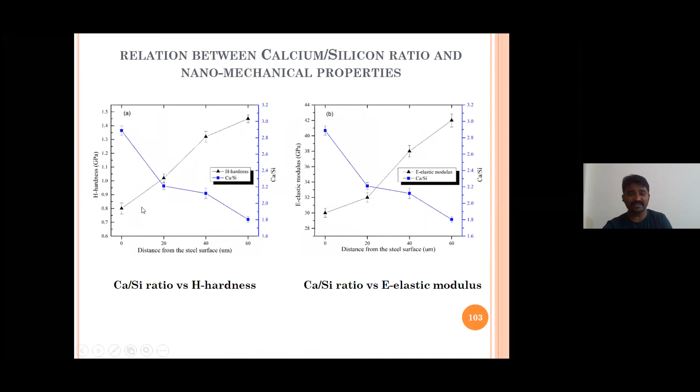Same way, we have done some studies with nanomechanical properties also. As Ca by Si ratio decreases, the hardness is increasing; as Ca by Si ratio increases, the hardness is decreasing. Same goes with elastic modulus also.

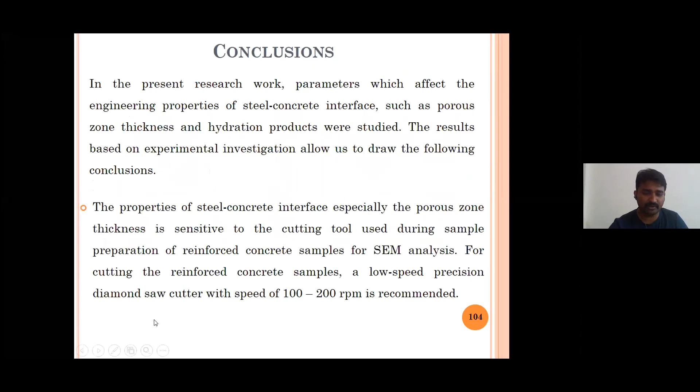Moving on with the conclusions, what we have understood from our study: the properties of the steel concrete interface, especially the porous zone thickness, is sensitive to the cutting tool used for sample preparation. So for cutting reinforced concrete samples, a low speed precision diamond saw cutter of speed 100 to 200 RPM is recommended.

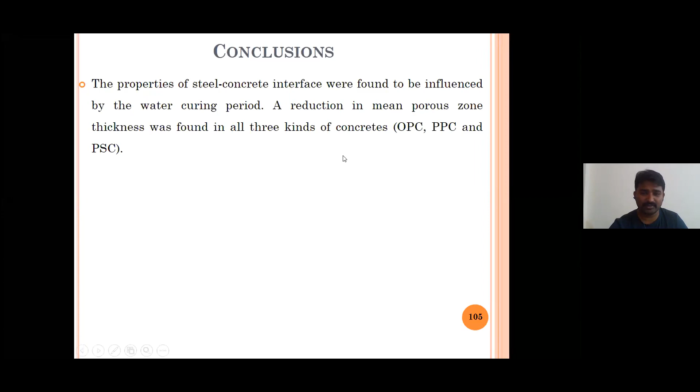The properties of the steel concrete interface were found to be influenced by the water curing period also. As the curing period increases, the Ca by Si ratio decreases, meaning some amount of hydration reaction is still happening at the steel concrete interface even after a curing period of up to 1 year. The reduction in mean porous zone thickness was found for all three kinds of concrete. The preferential formation of calcium hydroxide was confirmed through SEM images as well as EDS analysis.

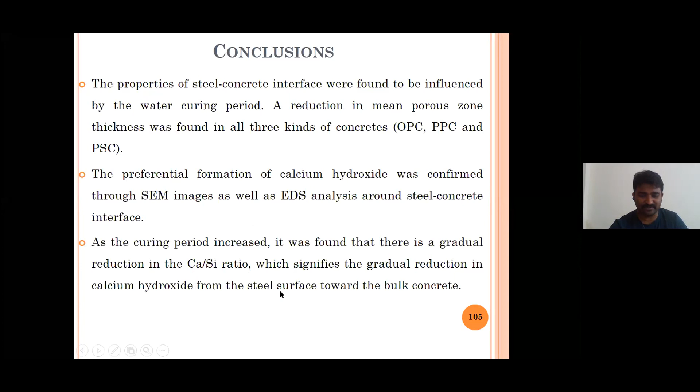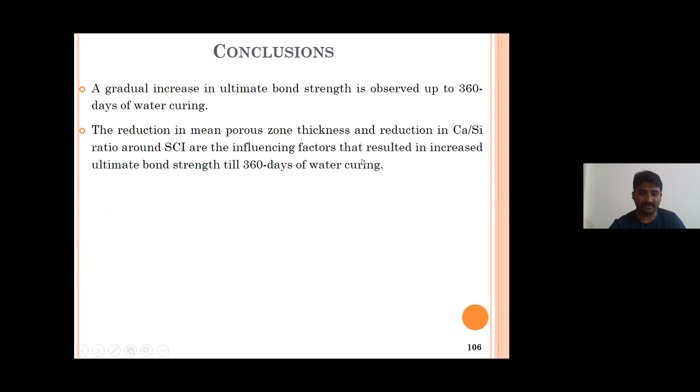As curing period increased, it was found that there is a gradual reduction in CA by Si ratio, which signifies a gradual reduction in calcium hydroxide from the steel surface towards the bulk concrete. A gradual increase in ultimate bond strength is observed up to 360 days because of water curing, constituting a reduction in porous zone thickness as well as reduction in CA by Si ratios at the steel concrete interface. These were a few of the references that I have selected.

Thank you. Before I conclude my session, I'll briefly explain what we have done. This was a completely research-oriented presentation. Those who are involved with this kind of work will only understand what we have done. Imagine somebody comes and asks you, sir, can you find the service life of this bridge? How do you say? There are different methods to do that.

One important parameter in prediction of service life is porous zone thickness, which mathematical models use. In previous studies, while predicting the service life, people were assuming the porous zone thickness in the range of 10 to 20 micrometers. But in our study, we have experimentally found out what the porous zone thickness is, and we have concluded that it varies with different parameters.

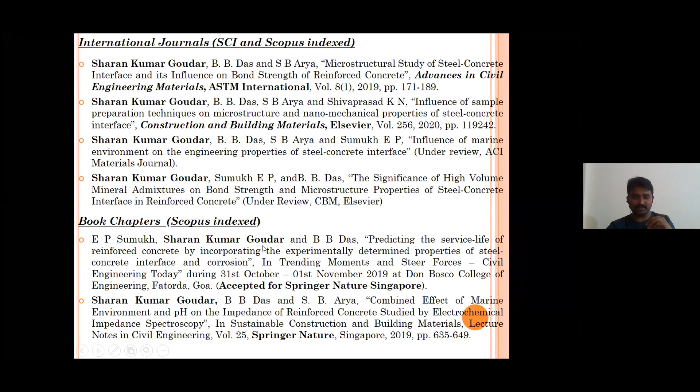From this, we could get a few publications. We have published in ASTM International, CBM. A few papers are still under review. There are also some Scopus indexed chapters. If you want, you can come and have a look at my profile. If you have any doubts, please ask, I would love to clarify them. I'll try my best to at least answer them.